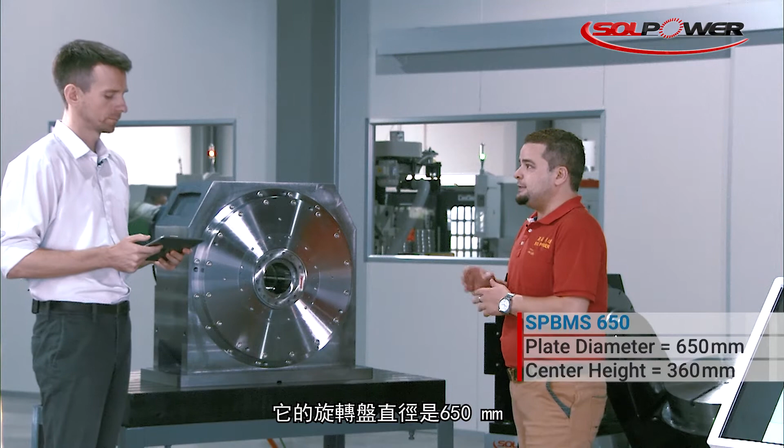And behind you? Yes, it's our biggest DD rotary table. It's called the SPBMS 650. The rotary plate diameter is 650 and the center height is 360. So, Sam, you are the sales manager here at Solpower. How do you usually help your customers pick the right model? What do I have to pay attention to when choosing a rotary table?

Well, good question. Every part in the rotary table is very important. So let's start by introducing our DD rotary table in general. Wait, DD? What is DD? Well, it's how they say it in Asia. DD stands for direct drive. It's a simple way to say it, because direct drive is too hard. DD is easier to pronounce. All right, so you wanted to talk about the components.

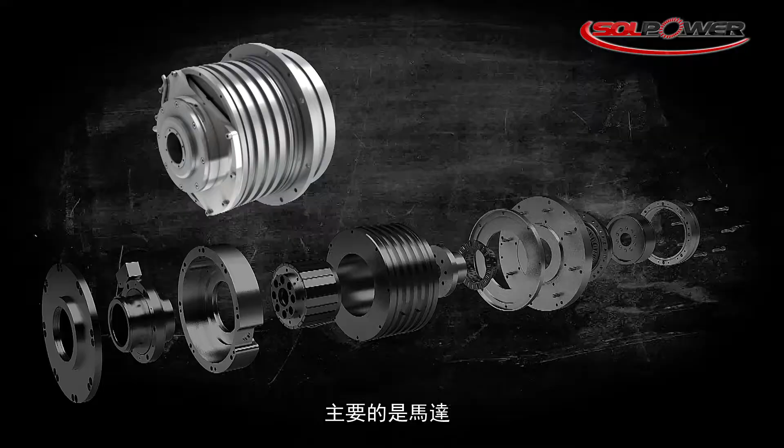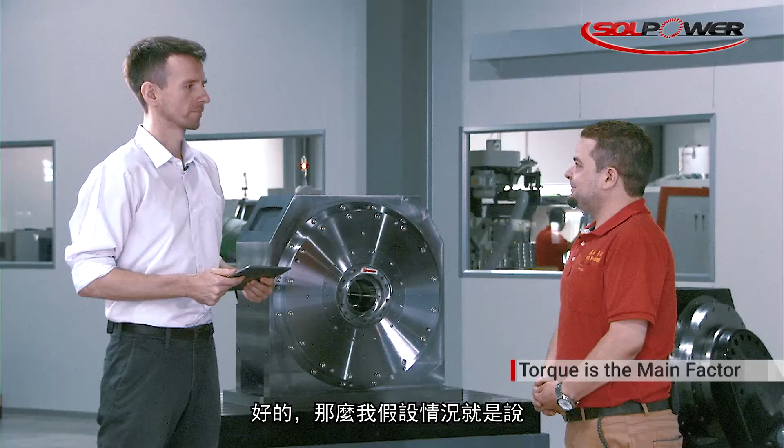The main components of the rotary table are: first, the motor elements; second, the bearing system; third, the clamping system; and fourth, the encoder system. But in general, what customers first ask about is the torque. Torque is very important because it's related to the size of the DD rotary table. So I would assume the bigger the rotary table, the bigger the motor you can install inside and the higher the torque?

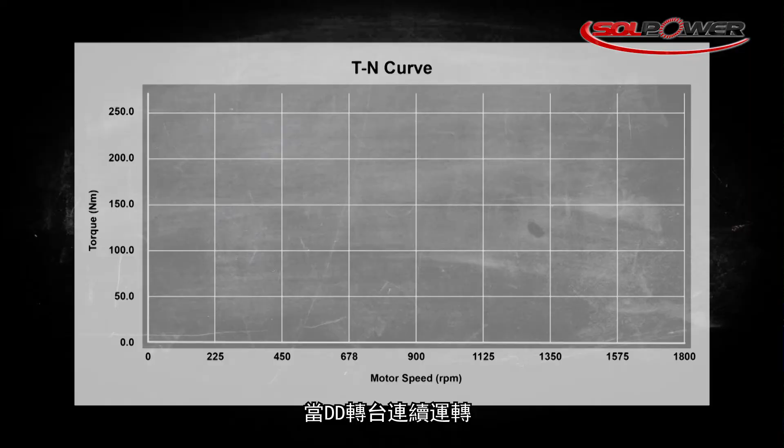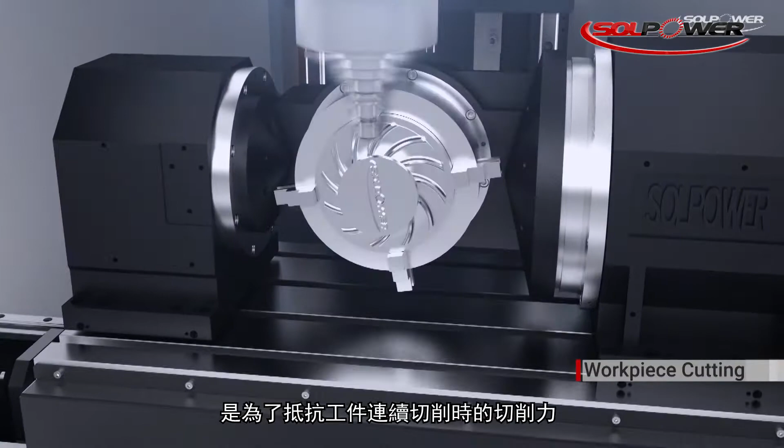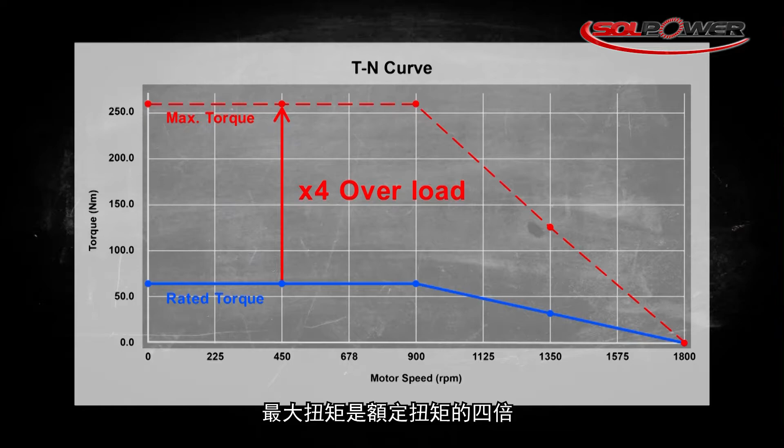Technically yes, but we still have the rated torque and the maximum torque. The rated torque is when the DD rotary table operates continuously without getting overheated. The maximum torque is when it's working instantaneously. So the rated torque is for workpiece cutting, and the maximum torque is for workpiece turning acceleration. As you see here on the table, the maximum torque is 4 times bigger than the rated torque. Like a rule of thumb, for all rotary tables? Of course, especially since we use magnets here, it's higher.

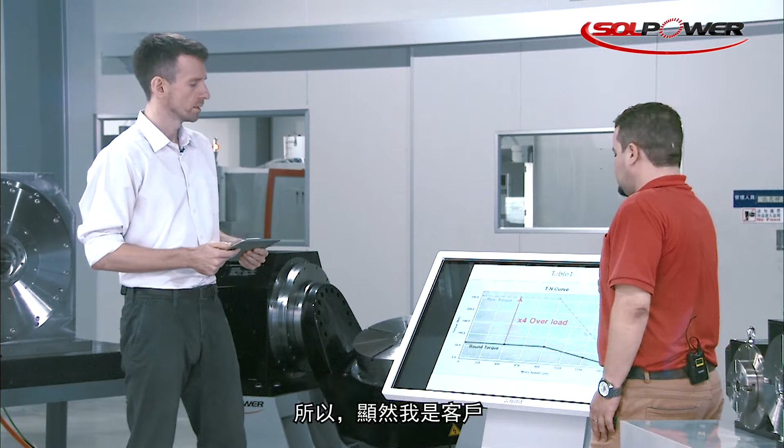So as a customer, you've got different models, and you need to tell me what's the rated torque and what's the maximum torque, right? So how do you measure that? Well, good question. Thank you for asking that.

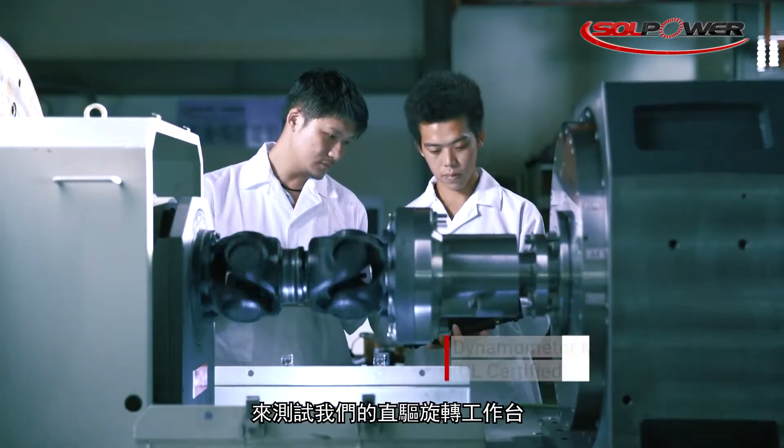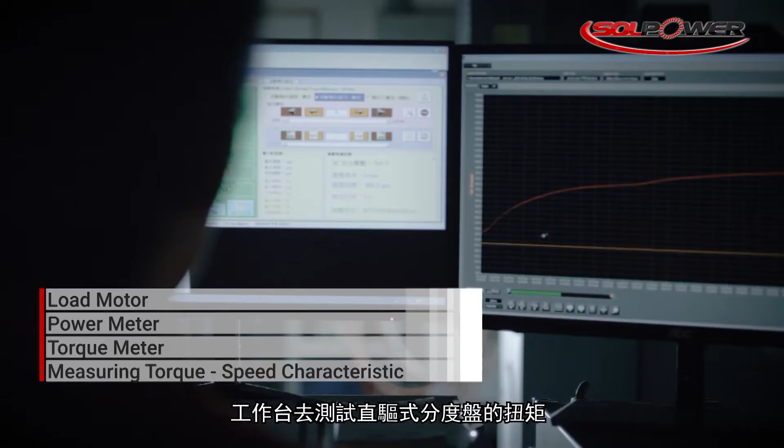We use the UL bench, the UL dynamometer bench, to test our direct drive rotary table. It consists of 3 parts: the load motor, the power meter, and the torque meter. We use this bench to test the direct drive's torque and speed characteristics. Okay, so it's like a testing bench following UL standards? Absolutely, yes. And you just mentioned a load motor, power meter, and torque meter. Can you explain these?

Well, in simple words, we don't want people to think that we're getting too technical here. Oh. Too technical. Yes.

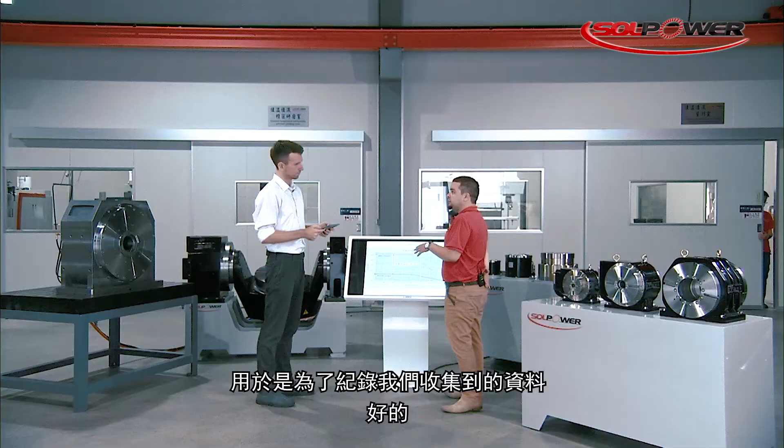Okay. So the load motor, in simple words, is when we want to find a suitable torque to test our DD rotary table, which we call the torque testing. And the torque meter and the power meter record the data we just collected. Okay. Actually, I think we should get a little bit more technical. Can you talk about that a little bit more?

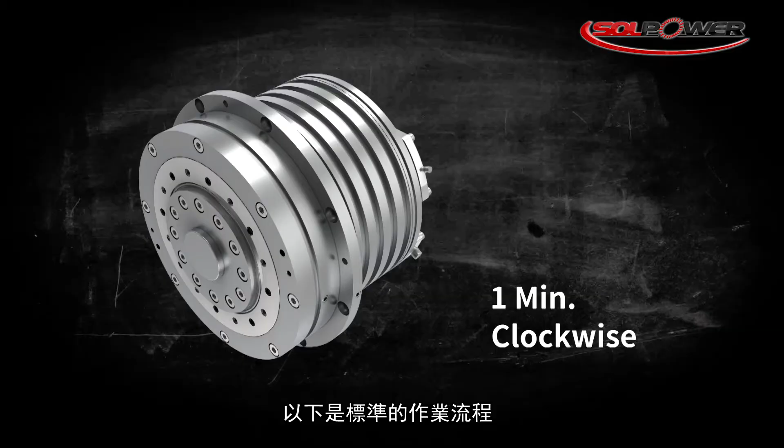Okay, well, the first thing here in this area, we need to tune our DD rotary tables using a servo motor to make sure that our DD rotary table runs smoothly without any load. So the standard procedure here is to make the motor run clockwise for 1 minute and anti-clockwise for another minute. Okay, got it. The current difference between both directions should not exceed half an amp. Okay, 0.5 amps. Yes.

Okay, so what's next? Well, after that, we set up the DD rotary table on the test bench with the load motor, and we have to make sure that both of the shafts are coupled perfectly. After that, we apply the test torque, as I mentioned before. So the DD rotary table starts to run from 0 to its rated speed. Then we start recording data, such as the power, speed, torque, voltage, current, temperature, and so on. Okay, so collecting all kinds of relevant data.

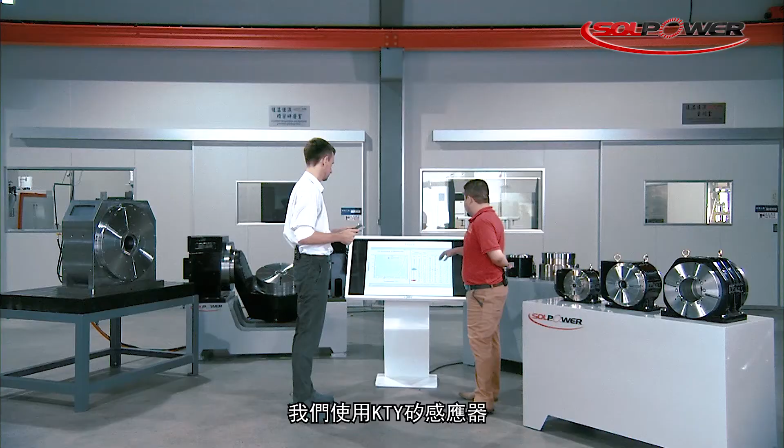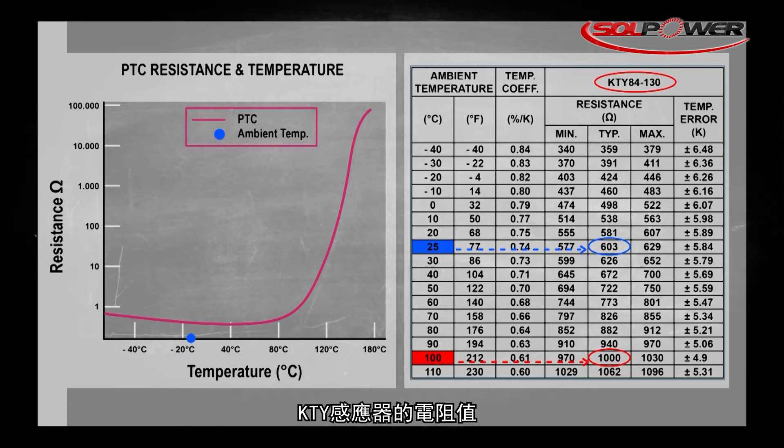Now you just mentioned temperature, and temperature control is something we want to talk about as well. How do you make sure that your rotary tables do not overheat? Well, it's one of the most important factors in a DD rotary table. As you see here in the table, we use a KTY silicon sensor. KTY sensor? Okay. We have it embedded inside the DD rotary table. And it's also a PTC kind, a positive temperature coefficient. All right. Which means, in simple words, the resistance of the sensor is proportional to the current temperature.

Okay, got it. Now, the sensor does not directly adjust the temperature, but it's very important for temperature control. So, Sam, how exactly does this sensor help prevent your rotary tables from overheating? Well, in simple words, the sensor sends temperature feedback to the controller, and the controller can stop the motor at any specific temperature. Okay, but I'm sure you also have to test that, right? Do you follow some kind of procedure there? Absolutely, yes. We test according to NEMA, the National Electrical Manufacturers Association.

Okay, so that's NEMA, insulation class F. Maybe you can explain it. Now we're getting even more technical. Okay, well, it means in an environment of 40 degrees Celsius, like here, it feels like it, the allowable equilibrium temperature rise at rated torque should be less than 105. And in order to reach that temperature equilibrium, we run the rotary table for 3 hours. For 3 hours? Wow, that's a long time. Why exactly 3 hours?

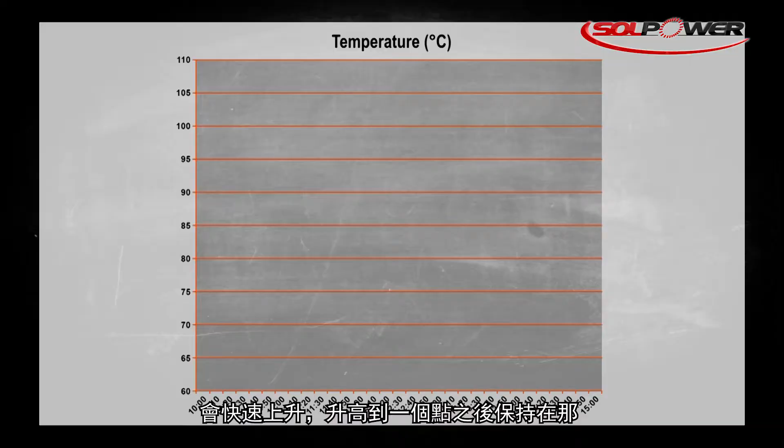Well, because during the first 30 minutes, the DD rotary table temperature rises rapidly, then starts to become stable. When I say stable, I mean the temperature rises 1 degree Celsius per 30 minutes. Okay. So after 3 hours, it's reached the peak most of the time? We can say so, yes.

Okay, so let's see if I have understood. If we have a surrounding temperature of, let's say, 30 degrees Celsius, and on top of that we add the 105 degrees, then we would have an equilibrium of 135 degrees, is that correct? Absolutely, yes. 100 points for me. So 135 degrees Celsius, that's how hot the motor gets inside your rotary tables? I wouldn't have expected that. It's so high. Well, it's very common for DD rotary tables. During the rated torque, the DD rotary table operates continuously, so we use a robust sensor to keep it from overheating and burning out the coil. And this is how we define the torque.

Okay, got it. So that's the built-in KTY sensor, monitoring the temperature and obviously sending out signals about the current temperature level. Of course. But you must also have some kind of system in place, Sam, with which you can reduce the temperature and keep it below a certain threshold, right? Of course, yes. In simple words, we have to use a water cooling system. Okay, a water cooling system.

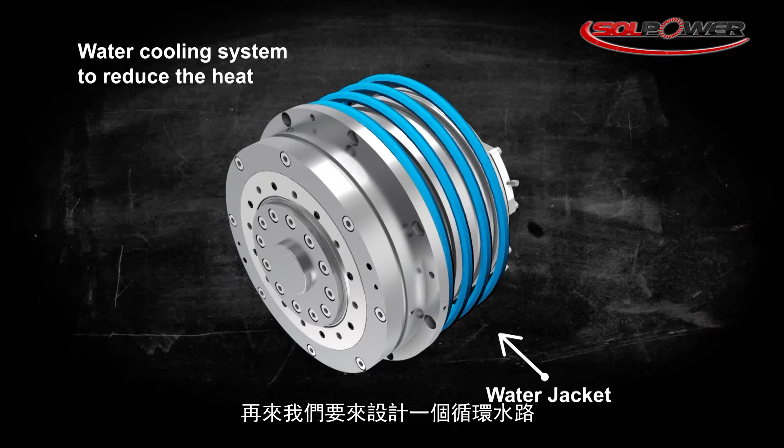Okay. So we have to design a circumferential water cooling on a workpiece, which is called a water jacket. Then we have to assemble the water jacket on the stator. Yes. And that's basically how the water cooling system is structured. Absolutely, and where most heat dissipates from. Sure, of course. All right, so I think we've covered this whole area: temperature control, heat generation, cooling.

And Sam, you just mentioned the stator and the rotor, and we talked about these components in the last episode when we were talking about motorized spindles. So I'm wondering, are those the same components? Well, basically they're the same. They both have a stator and rotor. The only difference is, in a motorized spindle, the rotor can be made of copper, aluminum, and magnet. But when it comes to the DD rotary table, the rotor can only be made of magnet.

Why is that? Why not the other materials? Because the torque is higher, that's why. So the other materials are not suitable? Yes, when it comes to the DD rotary table, it's not suitable. All right, excellent. Now I do remember that you highlighted last time that all the components of your motorized spindles are made in-house. Every single component, right? Now I'm sure people might be wondering, what about the rotary tables? Absolutely, end-to-end, all the way, yes.

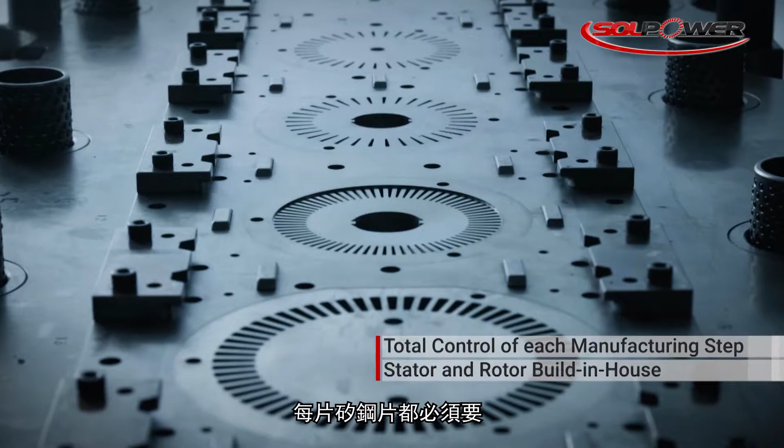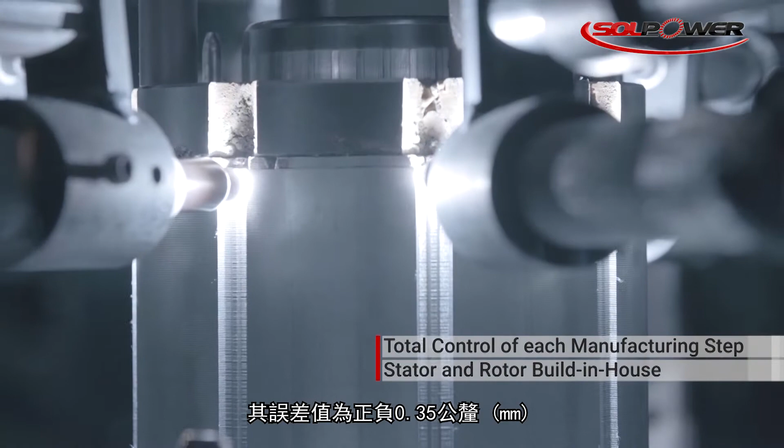Oh wow. We have total control over each manufacturing step. Let's say the motor lamination tooling or the stator punching process. Each lamination has to be stacked automatically and consistently. So we make sure that the total height of each stack is within a tolerance of plus minus 0.35 millimeter. 0.35 millimeters. Absolutely, yes. Very tight tolerances. I mean, it's crazy.

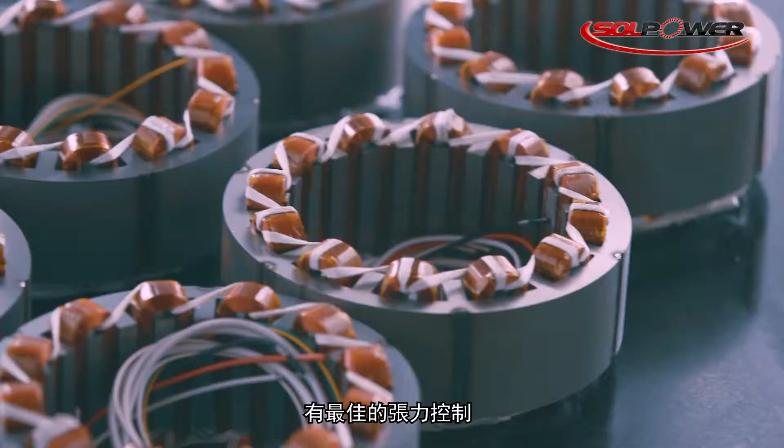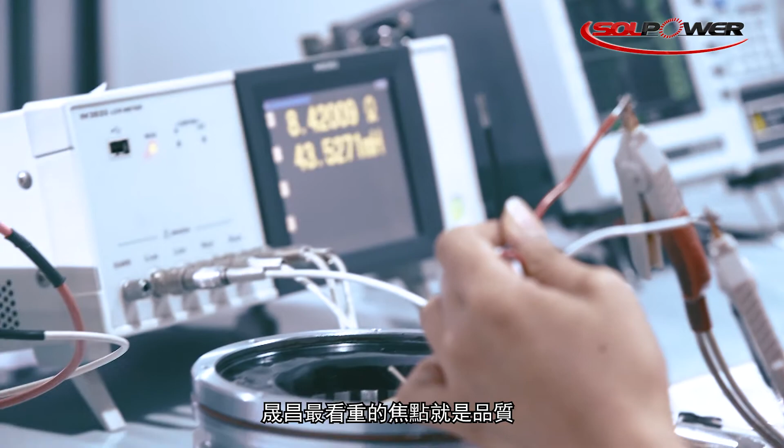So what about the winding? Well, we make our own winding machine with an optimized tension control to make sure that each stays the same throughout the whole process. After all, quality is one of the most important factors in Solpower, and cost effectiveness as well. Okay, so high quality, high precision, and cost effective. That's what Solpower is about? Absolutely, yes. All right, excellent.

So I think we can make a cut here. Sam, I don't know about you. We take a break. 休息一下. Sounds good. 休息一下. Right. Yes, okay, let's do it.

So we'll take a quick break and then we'll be back talking about the mechanical components such as the bearing system in more detail. Don't go anywhere.

Now today we are talking about the direct drive rotary tables, and in this segment we want to highlight their capabilities in terms of the manufacture of mechanical components, because there are some people out there who believe that Solpower is just a motor technology expert. Well, those people are mistaken, Sam, right? Because you also have the machines, the know-how, the experience to manufacture mechanical components yourself. Absolutely, yes. We have over 50 mechanical components inside the DD rotary table.

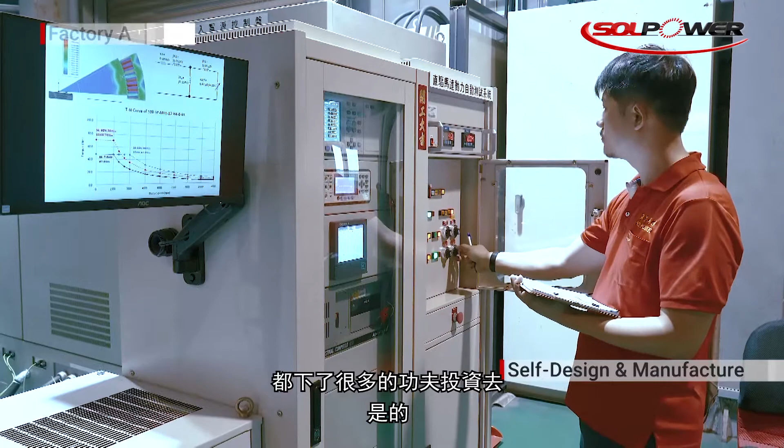Wow. So besides the fact we design it and develop it, we also manufacture all the parts here in-house. Every single part of these rotary tables, you manufacture yourself? Absolutely, yes. Thankfully, because of the increase in our revenue. Oh, good for you. Yes, thanks. So we have invested heavily in our R&D resources and our manufacturing technologies. At the moment, we have 2 factories and 4 assembly lines. Wow.

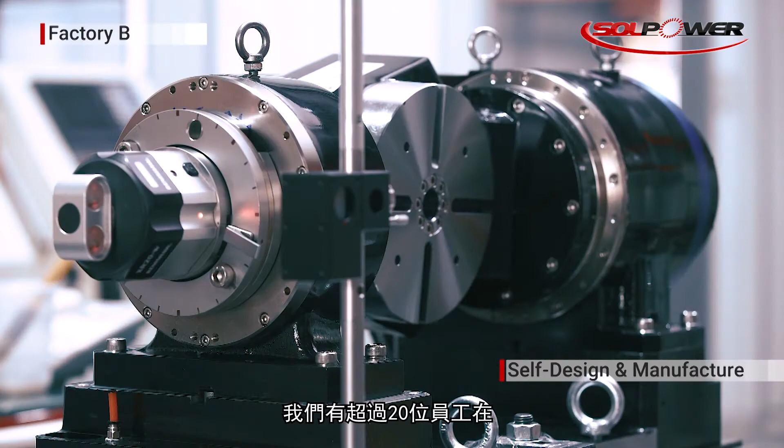And speaking of the DD rotary table, our topic today, we have over 20 employees working in the R&D department, and over 20 models in production as we speak. Okay, 20 models. So I think it's time for my second math equation of the day. So we've got 20 models times 50 components that you mentioned for one rotary table. So that's 1,000 components. Of course, some of them are the same components, but still a few hundred different components that you need to manufacture. So how do you make sure that you reach the high quality for every single one?

Well, speaking of the DD rotary table, for the past few years we have enhanced and upgraded our capabilities in both the quality management and CNC grinding machining department, both in hardware and software. Okay, hardware and software upgrades. Can you tell us a little bit more?

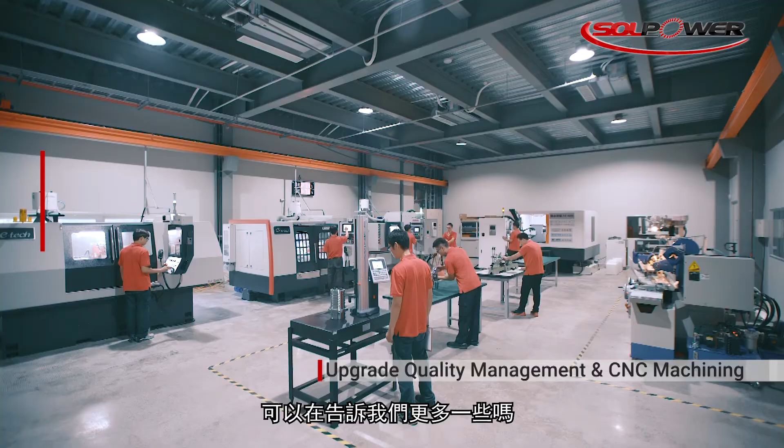Well, in hardware, at the moment, we have three CNC grinding machines, 2 electric height gauges, and of course, besides the CMM instrument inspection. And in software, we already have the product ID card, in which we include some specifications, like the vendor code, part numbers, delivery date, and critical dimensions of some parts. So our R&D teams can easily access that info at any time. Okay, so hardware solutions and software solutions.

And very soon we're going to be applying the QR system. Okay, so QR product code system soon to be implemented. Yes, very soon. Okay, excellent.

Now, Sam, 50 components, and from these 50 components, there are a few that are necessary to build the bearing structure, right? And it's a very important component of the rotary table. Of course, as we mentioned earlier, the bearing system is one of the most important factors when it comes to the DD rotary table. Okay, and I think you've got something prepared for us to talk a little bit more in depth about the bearing. Absolutely, we got a few things we want to show you. So let's do it. Let's take a look. So Sam, the bearing system, take it away.

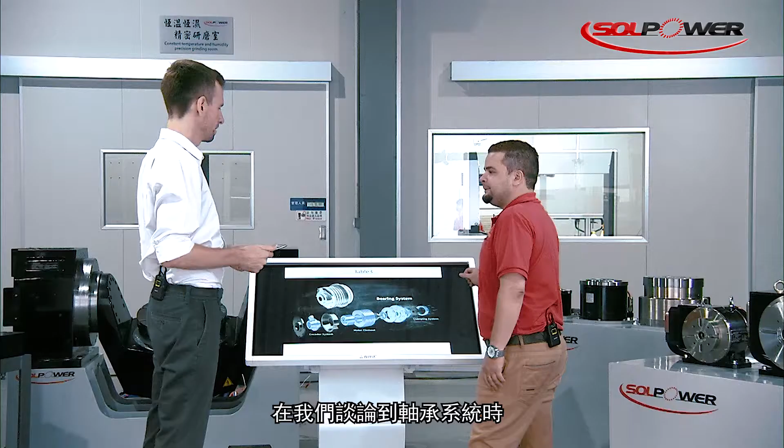Yes, well, the bearing system is located in the front area of the DD rotary table and behind the clamping system. Now, when we're talking about bearing systems, I would assume there are different kinds. Actually, there are a lot of types, yes. But today we're going to mention three types because we're going to speed it up today. So let's see table 4. All right, 3 types? Yes, as our audience sees here, we have the tapered roller type, the cross roller, and the axial radial.

All right, and you just mentioned your customers, so me as a customer, what kind of considerations do I have to make when choosing the bearing type? Well, any customer will first consider the price. Right. So yes, the budget. Pricing is the first factor here. Then comes the quality, the rigidity. Then comes the installing space. Okay, and how do they differ?

Let's start with the tapered roller pair. It needs more space because it's assembled back to back with a spacer between them. So obviously it has a low rigidity, and the price is low as well. Okay, so this is like the cheaper variant. Yes, it's the cheapest of those 3 types. Okay, then the cross roller? Yes, the cross roller type, as our audience sees, needs less space to install, although it has the same rigidity as the tapered roller ones. But the price is a little bit higher. Okay, higher than the tapered roller pair type.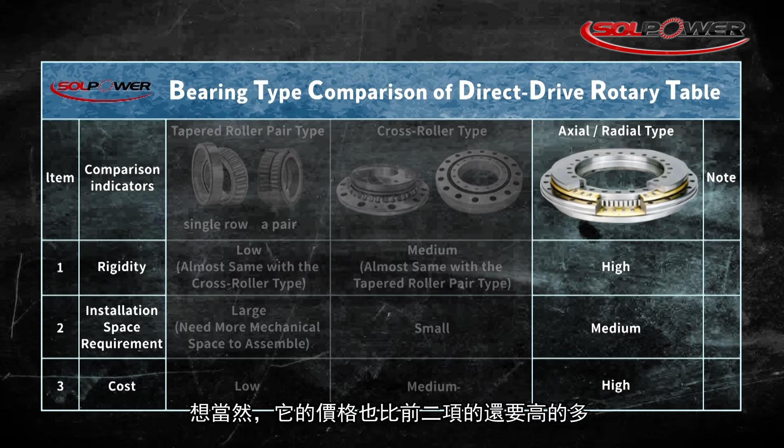And finally we have the axial radial one. It has the best rigidity, and of course it costs much more than the other 2 types. All right. Now, of course, the main factor for many potential customers is their budget, obviously. Absolutely. But if we are talking about a direct drive rotary table, which of these bearings is most suitable, you think? Probably the high rigidity one? Well, of course, at Solpower, the most important thing when we manufacture any product is quality. So back to your question, of course, the axial radial type is more suitable. If it's within the budget. Absolutely. It still depends on the customer too.

We still use other globally well-known brands such as INA and Myonic. All right. A few years ago, after intensive quality control inspections and rigidity testing, we decided to use our own, because in the past we used to use just those well-known brands. But as you know, and our audience knows, we all want the best price and of course the highest quality we can get.

So we now manufacture here at Solpower. And you mentioned earlier you invested heavily in some equipment, like manufacturing equipment, grinding machines, CNC equipment, inspection machines. Yes. And that's why you have the capability to manufacture bearings yourself. Totally, yes.

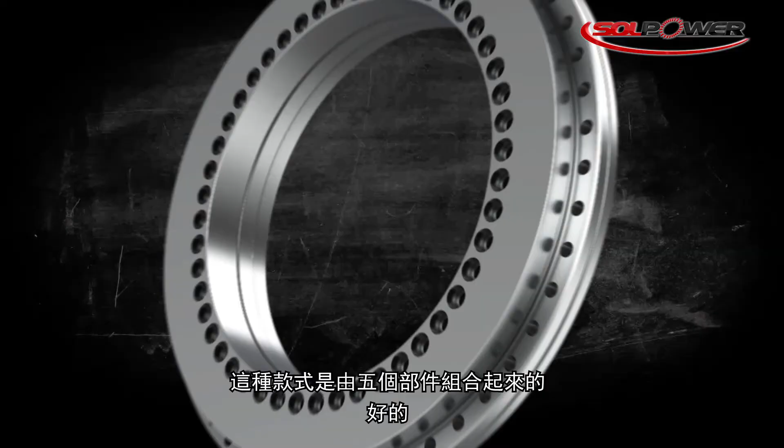Okay, so axial radial type, that's the type that you install on your direct drive rotary tables. So maybe you can tell us a little bit more about the axial radial type. Of course. Well, the axial radial type is composed of 5 parts: the retainer, the roller, the body, and the front and the rear case. Here at Solpower, we consider the body and the front and the rear case as a 3-piece structure. So the retainer holds the roller within this 3-piece structure.

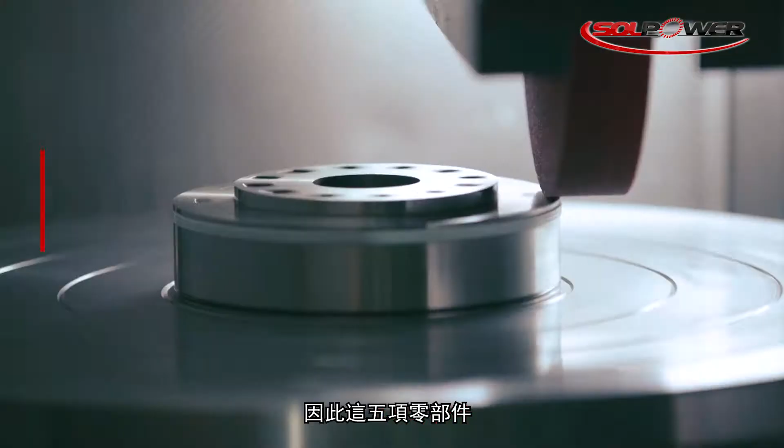So all of these 5 components have to be done here in house at our CNC grinding machine department. So we make sure that the geometric precision is within 1 micrometer. Of course, that includes the flatness and the parallelism as well. 1 micrometer, so that's 0.001 millimeter. Yes, absolutely. Very tight tolerances. Well, after we measure these critical dimensions, we apply them into the product ID as one set. So each one of those has the same tolerance.

And the gap between the roller and the 3-piece structure is within -5 micrometers. So that means after the assembly, we compress each roller by 5 micrometers. We call that the interference assembly. Interference assembly, okay. Now, how do you go about increasing the rigidity if you want to reach even higher rigidity? Well, first of all, we need to understand one thing. Compressing generates the rigidity. So in order to increase the rigidity, we need to increase the interference as well.

And as we all know, if we increase the rigidity, of course the temperature goes up during the turn of the DD rotary table. So back to your question, if we want to increase the rigidity, we absolutely have to reduce the speed. Yes, and that's how we control the bearing rigidity.

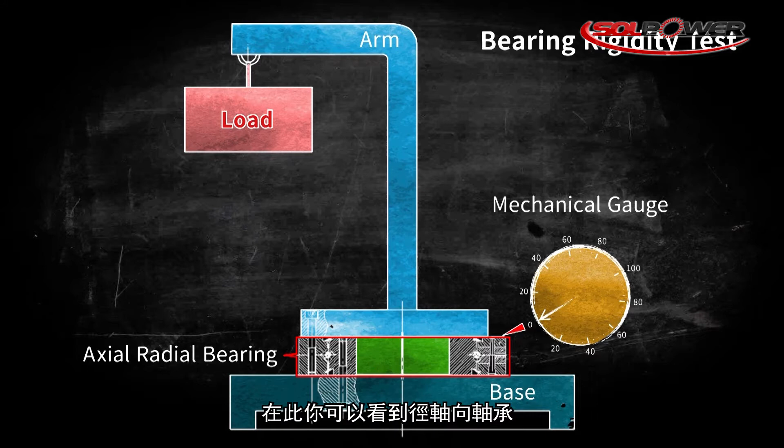And speaking of bearing rigidity, Sam, in practice, how do you check the rigidity of your rotary tables? Okay, let's see here, table number 5. We have a bearing rigidity test in one of our assembly lines. As you and our audience see, it consists of the base, the arm, and the load. And you see here, the axial radial bearing is assembled on the base. So through this load, the bearing will deform. So we use the gauge to measure the value of the deformation, in order to calculate the rigidity.

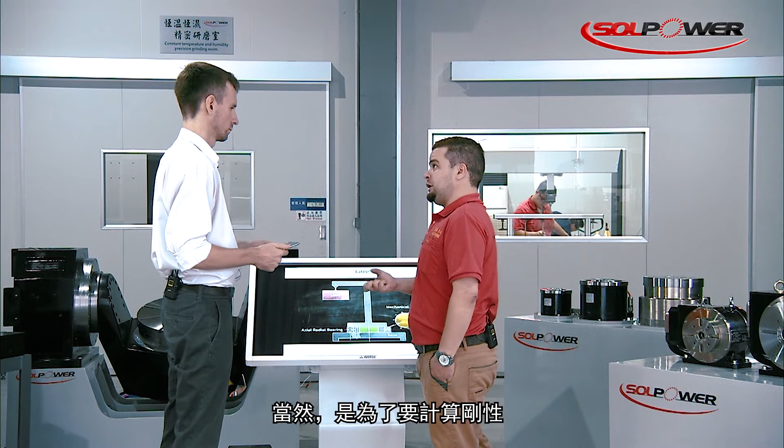Okay. Now, axial radial bearings, that's the type that you use. How many different models do you have? Well, so far we have 5: the BRT 80, 120, 150, 200, and 260. The 80, the 120, it's the inner diameter of the bearing.

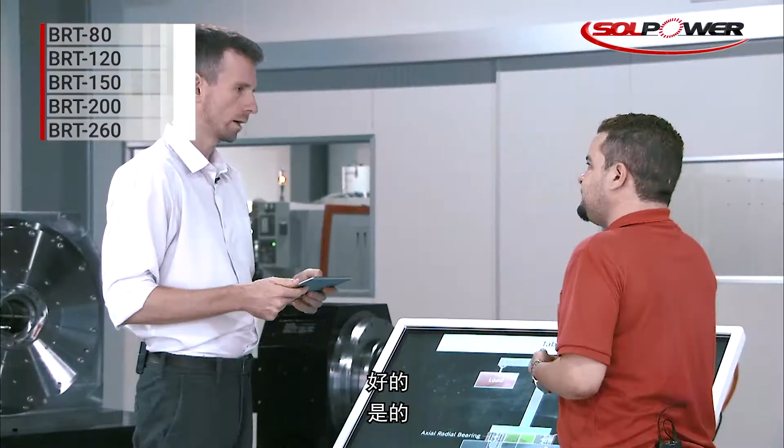Now, obviously, you manufacture motors, you manufacture direct drive rotary tables, so I can buy rotary tables from you, but could I also get just the bearing? Definitely not. It's not for sale. We don't sell them. Why is that? Because we spend a lot of effort and we invest heavily in manufacturing these components. So far, we're just going to use them for ourselves.

Okay, so bearings made in-house. So is the clamping system as well. Clamping system as well. So as we said, we're not lying. It's true. End to end. Every single part. Yes, absolutely.

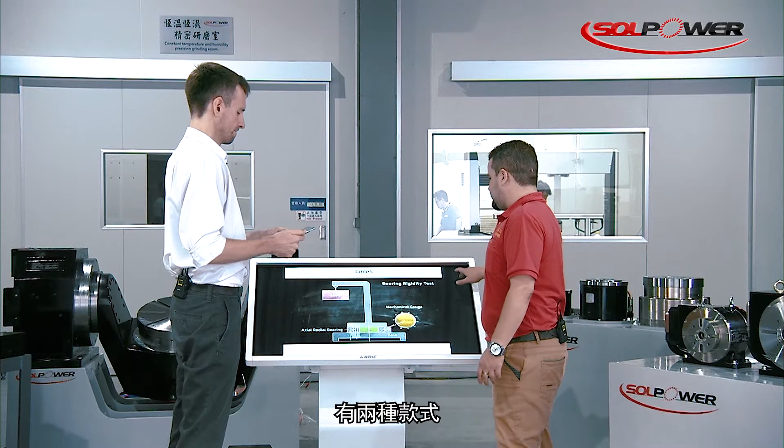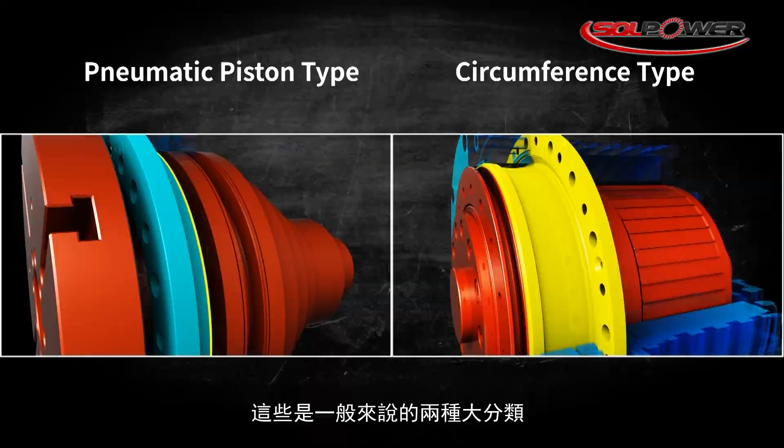Okay, so you just mentioned clamping systems. Maybe you can tell us a bit more about the clamping system. Speaking of the DD rotary table, there are two types. As you see here, the pneumatic piston type and the hydraulic circumference type. Okay, so why don't we talk about the pneumatic piston type first? Well, at Solpower we only use the pneumatic piston type. Oh, so those are the two most common types? Yes, most common. But at Solpower, you only use the pneumatic piston type. Circumference type, you're out. Absolutely, yes.

So, pneumatic piston type. Tell us more. Okay. Well, the pneumatic piston type is composed of two major parts: obviously the piston and the liner. The liner is fixed. We assemble it fixed on the DD rotary table shaft, and it turns synchronously with the shaft.

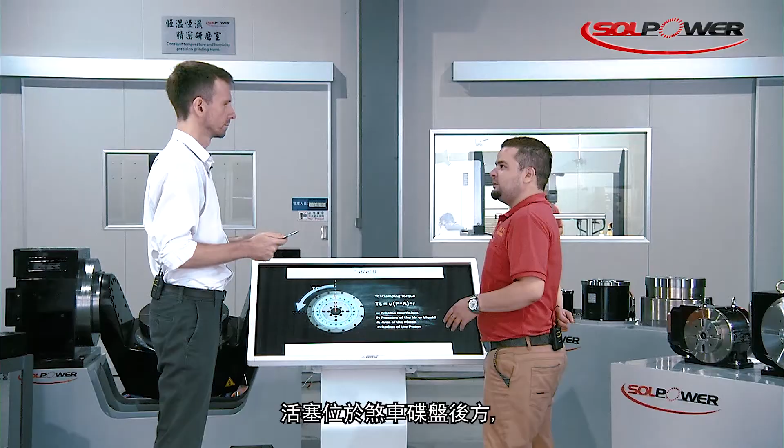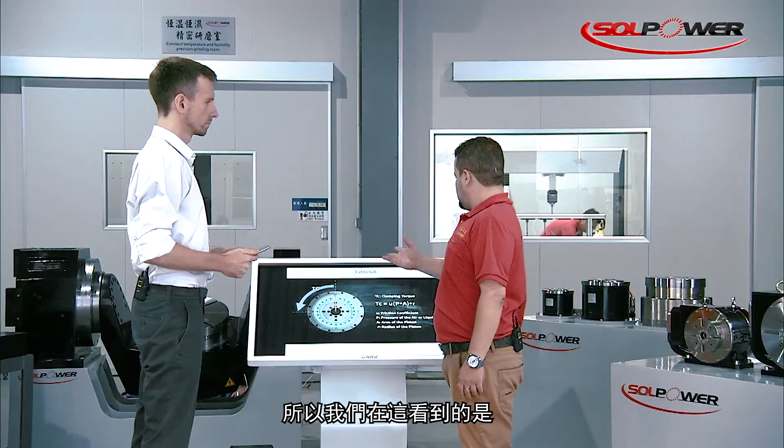And the piston is located behind the liner, and the piston is either driven by liquid or air. The mechanism, in simple words, is when the piston moves forward, of course, it forces the liner to clamp on the motor, right? And when it moves backward, it will release the clamp. Okay. So as we see here, that's the way we calculate the clamping torque.

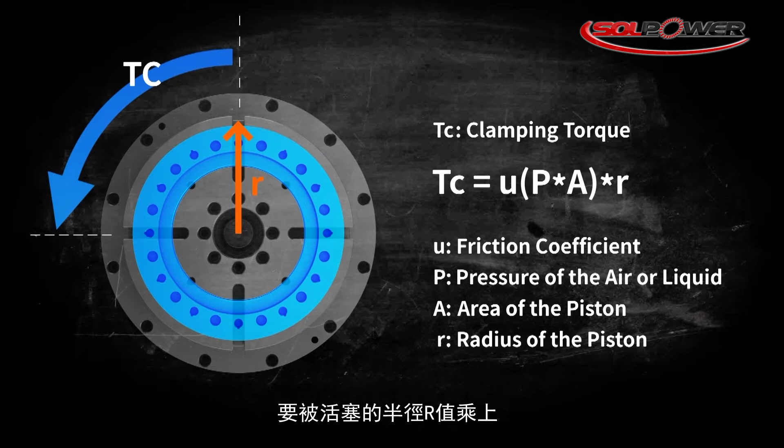So here, the TC is equivalent to mu, which stands for friction coefficient, all multiplied by P, the pressure, A, the area of the piston, and multiplied by R, the radius of the piston. Okay, so that's the equation, how you calculate the clamping torque.

Yes. So now you've basically turned into my physics teacher. Sorry. So I don't understand anything. It has to be said, yes, sorry.

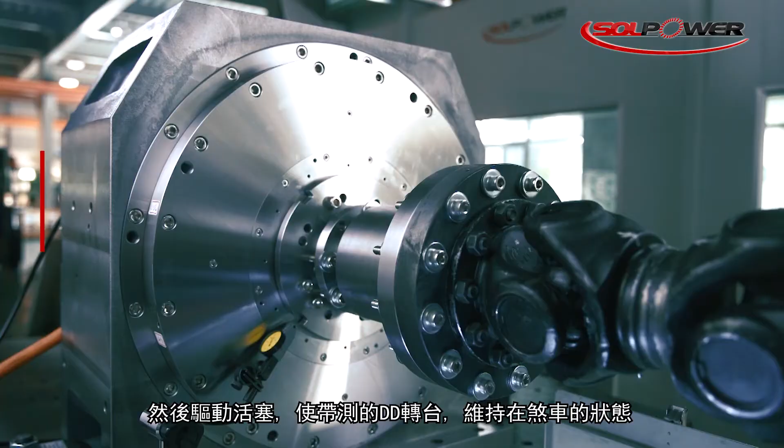But maybe you can give us an example or tell us how, in real life, do you test the clamping torque? Okay, well, there is a clamping torque and a clamping rigidity. We use our UL certified bench to test the torque here. Okay, there's a bench again? Yes. So by coupling the load motor with the DD rotary table perfectly, then we force the piston to clamp on the motor case. Hence, in that situation, the shaft is locked.

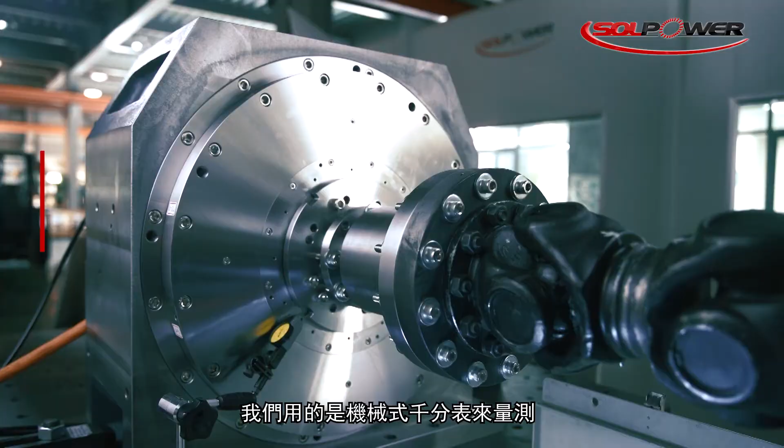So gradually, after that, we'll start applying the torque until the DD rotary table turns. That moment we'll have our clamping torque. Regarding the clamping rigidity, we use the dial gauge to measure the radial deformation of the rotary table. Okay. I think I'm slowly starting to understand it. It's kind of complex, so maybe we can illustrate it by talking about one of your products?

Sure, absolutely, sounds good. What about we talk about our largest DD rotary table, if you still remember that one? Yes, absolutely. The SBB, okay. So clamping torque, if you want to measure it for that one. Okay, let's go. Here you go. So as you see here, after we do the required calculation, we'll get the clamping rigidity of 500 Newton meter per 3 arc second, right?

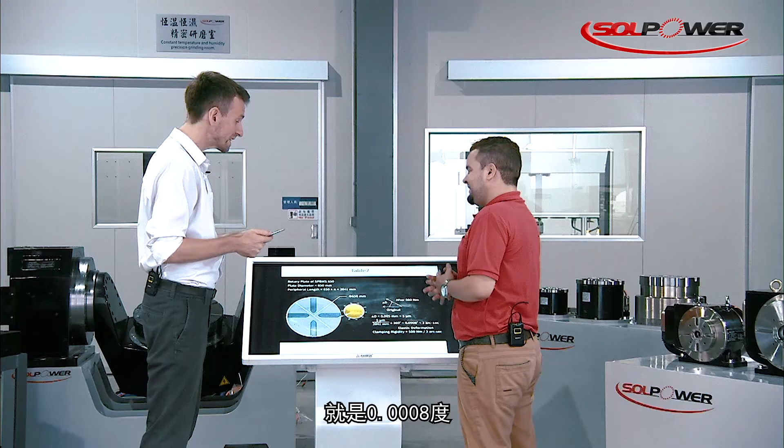Okay, so that's the process that you just described, right? Yes, absolutely. So let's see. When we apply a 500 Newton meter torque to the shaft, during clamping, the rotor will turn 3 arc second. Well, in other words, the angle degree is equivalent to 0.0008. 0.0008 degrees. Wow, that's crazy. Yeah, but it's very, very common when you're talking about the DD rotary table.

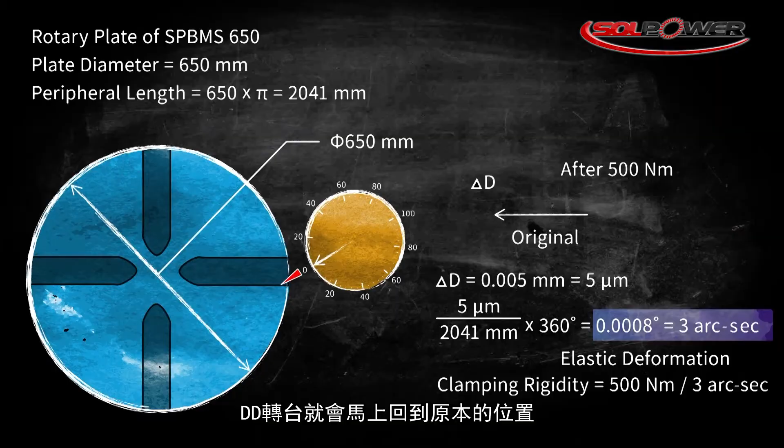Okay. So then when we stop applying the torque, the shaft will go back to its original place instantly. And this elastic deformation is called clamping rigidity. So that's actually what clamping rigidity means. Yes. Okay, a very complex process. So Sam, thank you very much for explaining it to us and for sharing your knowledge with us.

Our pleasure. And the reason why we've been talking so extensively about all this is because we wanted to illustrate that Solpower is not just a motor manufacturer, right? Yes, we also have the capabilities, the knowledge, and the machines. DD rotary tables, absolutely, as well as the motorized spindle. And following all important international standards. Exactly, starting from the stator and the rotor, yes. Okay, beautiful. So we're done, I think, with our main part for today.